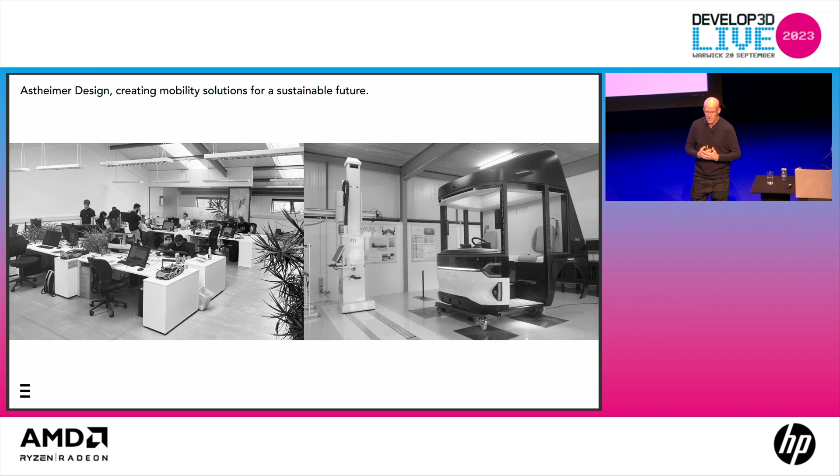Astheimer Design - we're based in Warwick. We're 12 people: designers, modelers, visualizers, and design engineers, and we're focused very firmly on the creation of mobility solutions for a sustainable future. That being said, we do work on a bunch of different projects - consumer electronics, mobile phones, furniture, etc. I think that's good because it enables the designers to work on different things. There's good cross-pollination of technologies and know-how, and it keeps the mind fresh in terms of creativity.

So just a selection of some of the projects we do, have done, and can show. A lot of this stuff, obviously, we can't show - as a consultancy, a lot remains confidential, especially until launched, and often even when they're launched we can't say we've worked on them. But a real broad spectrum of mobility, from aviation to marine to commercial vehicles, leisure vehicles, personal mobility, commercial mobility. Yeah, it's a great place to be in.

It's an area that as a team we're passionate about, and the projects seem to be becoming more and more varied, which is fantastic - it's great just to hop around the desks and see the variety of work being done. We work with a whole bunch of different clients, in a real collaborative way - not just with the clients themselves, but with engineering providers. Being 12 people developing a full vehicle, we need to work with other service providers: engineers, software designers, manufacturing engineers, to get the job done.

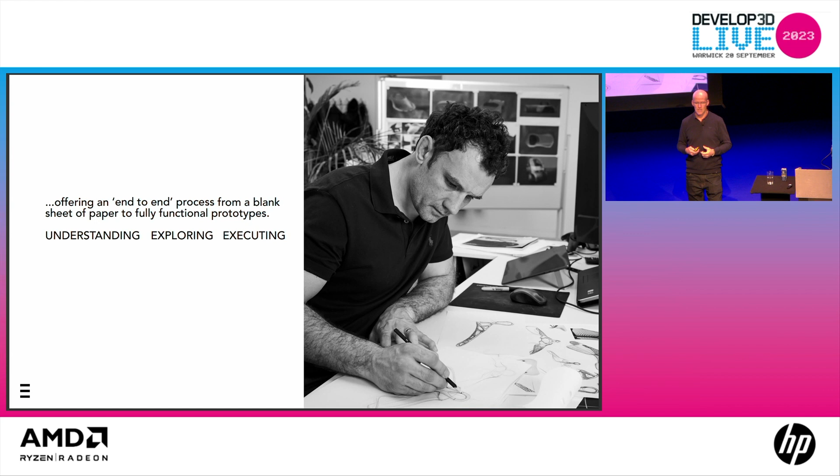As a consultancy, we don't have the time scales that in-house design studios often have. So it's all about aiming and being very focused on where you're exploring, doing that exploration, and then executing. Being a small team, we pride ourselves on being flexible, dynamic, and tenacious, getting the job done and doing what's needed. I think the people that really thrive in our environment are the real tenacious individuals, not least Alex, who sat here at the front.

Some of the themes that are really affecting mobility and the design of mobility: the changing context is one which is evolving, and it'll change this afternoon at 4:30, or it might not, who knows, but it's changing all the time. Vehicle architecture, with electrification, we don't need the cooling up front of the vehicle, so we can change that vehicle architecture. There's that opportunity to change vehicle architecture, which is fascinating.

New types of vehicles. The electric motor has enabled the ability of vertical takeoff aircraft, but also of foiling craft as well, and the size of the motor, the ability to feed it with a wire rather than a drive shaft, enables different vehicles now to become valid. And then just a brief look at the future at the end. So these are some of the themes that we'll be looking at.

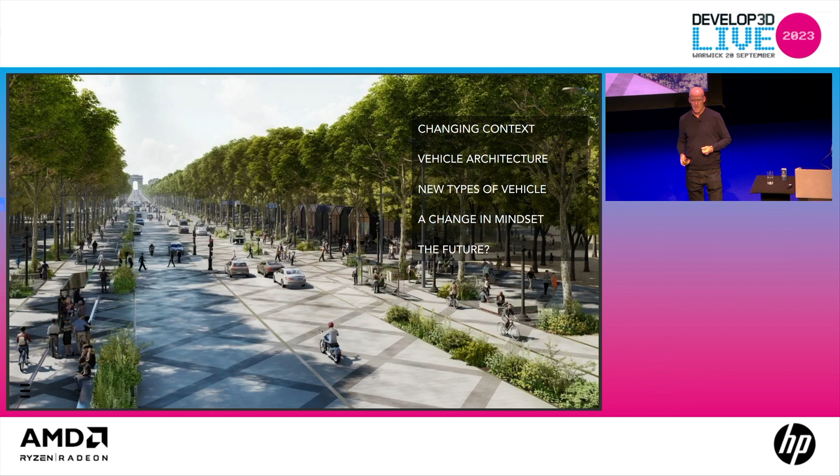I'll illustrate some of these themes with a case study that we've done, especially the first one of changing context, which I guess is pretty topical today. This is a project that we've done, and the most recent project that we've launched. It got launched at LCV at the start of September.

So, changing context. It's the cities and the big cities which are leading the way in change. It's actually the mayors of the cities who have pretty much more power than the prime ministers or presidents of a lot of countries to dictate what happens in their city, as we've seen with London and Sadiq Khan holding up his ULEZ change of legislation.

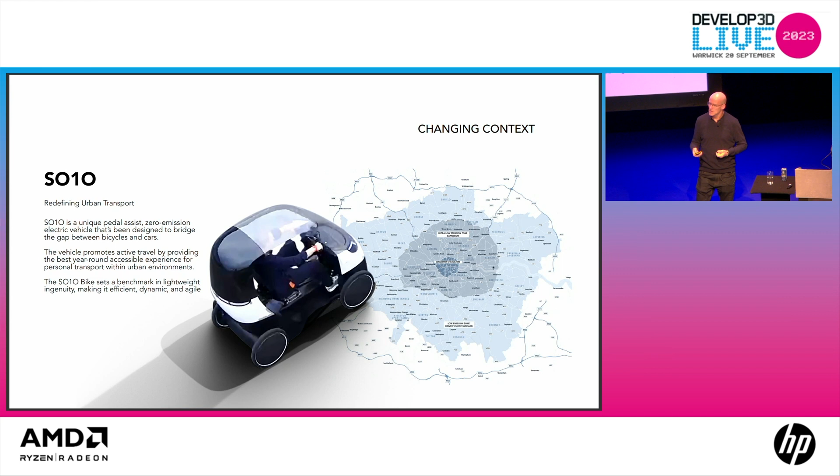Based on this scenario and this context, we created a small consortium along with ProDrive and an entrepreneur who is driving the project to create a small pedal assist vehicle intended principally for ride sharing. This is the first real showcase to show the process that we've been through, and I think it illustrates really well the process that we go through of design, development, and prototyping.

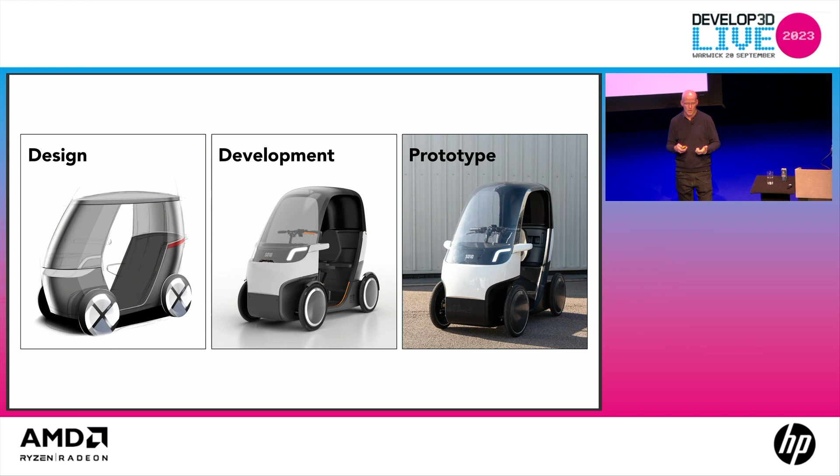It shows that very rapid product development process that we go through in the studio. So onto the design - we knew it wanted to be a 1+. We created an initial package that would allow for the motors, the batteries, the ergonomy of a single driver plus, and the idea of this pedal assist vehicle was to really extend the inclusivity of rideshare vehicles.

The cycles and scooters are principally used by young males. Very few females actually use the bikes, the Santander bikes in London, for example, or the scooters. So there's obviously a need for inclusivity, and there's obviously a need - if you want to carry something, what vehicle can you use? So this is aimed at that target market.

There's obviously a place for a scooter, there's obviously a place for a bicycle - great products, electric bikes - but there's obviously a gap in the market for an inclusive product of this type. So we wanted the design to be inclusive. It needed to be friendly, but it needed to be a desirable product, look dynamic, and attract people to use it. So that was the sort of briefing that we set out.

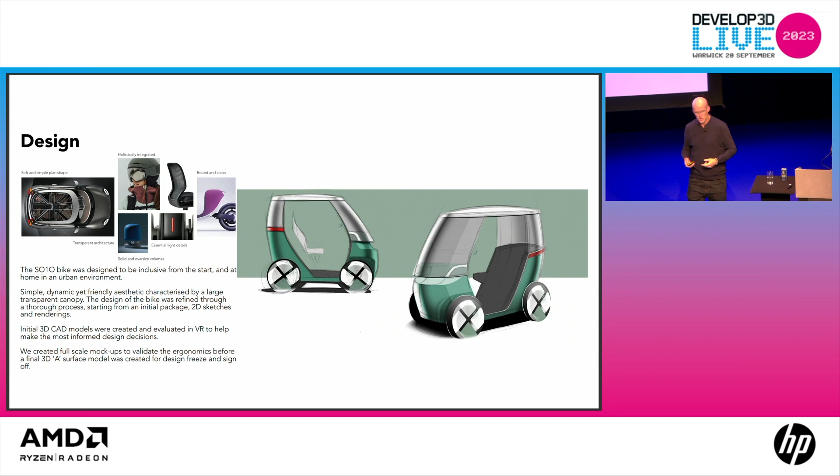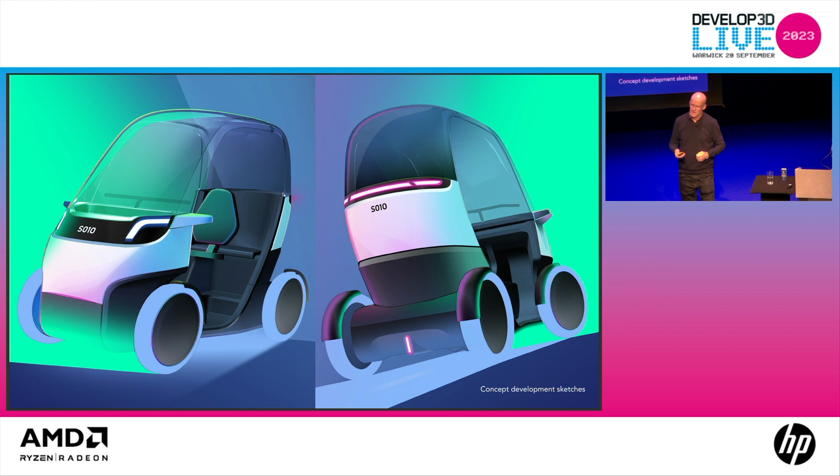We generally set out mood boards with imagery that creates that sort of feeling, and then from there the sketch phase. Pretty quickly from there we develop quick CAD models, so we move into sub-D - very quick CAD models which express that design intent over a package. These are quick renders out from there, made to look a bit poppy and fun, expressing the character and nature of the vehicle, and then from there these get developed into full computer-aided styling models.

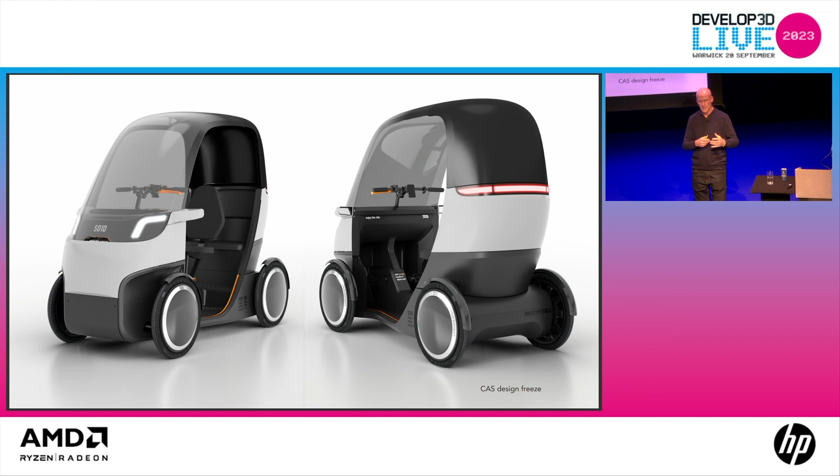We go into NURBS. We generally use Rhino, we have Alias, we use other sub-D modeling as well, but our general workflow is generally Blender, then through into Rhino, and then render in a variety of softwares depending on the type of vehicle, the type of product that we're rendering. I think in this case these are V-Ray, but there's a variety of different rendering tools depending on what we're doing, whether we're going into VR to analyze the product or not.

It's very much designed around the user, this product, for simplicity of use. You're going to have different people hopping in and out, so it's absolutely fundamental that the product is simple, intuitive and adaptable for different heights and sizes of people.

This is just some examples of the use cases of this vehicle. Not least when it's bad weather, you don't particularly want to be on a little scooter, but having a canopy above you will absolutely help. So just some of these images are CAD renders of the vehicle in use.

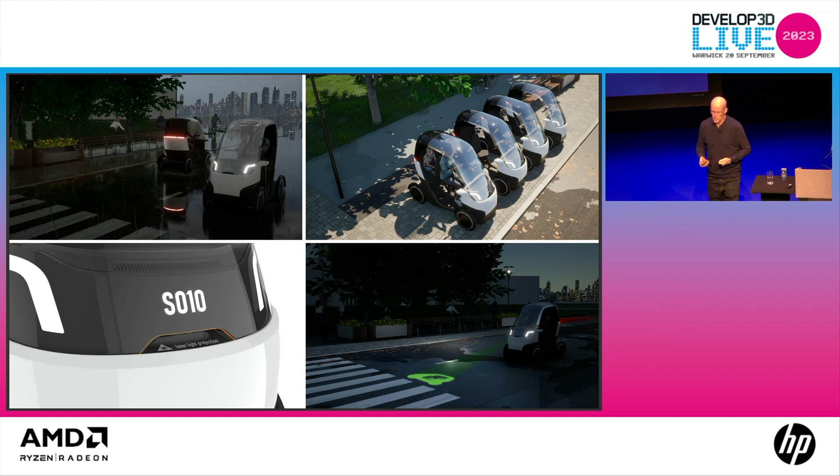Now on to the development of the actual prototype. The way we've worked with ProDrive in this instance is that they were responsible for the drivetrain system and the chassis, and we were responsible for all the touch points of the product - all the bits that you see basically, and the ergonomics of the vehicle.

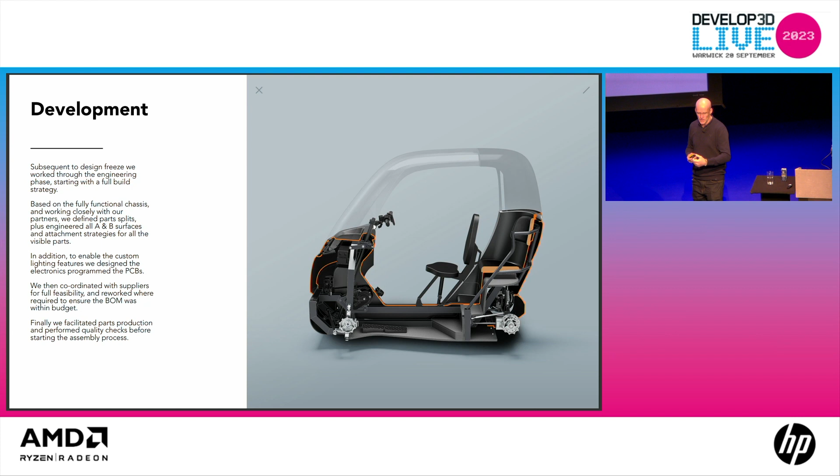Once we've got a CAD or a CAS, a styling freeze, a design intent, there's obviously that need for close collaboration with the engineering team to define the architecture of the chassis. Then we go through a phase of build strategy - how we're going to split the parts out, how we're going to build them, how they're all going to get together, how we maintain that fit and finish. So we explode out the CAD, create that build strategy, and that's done through the design engineering department of the studio.

Just something to highlight which was particularly of interest in this very small vehicle - you want to keep it as absolutely as small as possible - was the ergonomics.

There's going to be a lot of different sizes of people here, and there's a lot of different moving parts - you've got the pedals, you've got the steering wheel, you've got visibility lines, you've got to get in and out. So it's slightly more complex than just a standard seating position in a car.

There's a lot of different moving parts, and the thing we decided we needed to prioritize was the sightline - no matter what size of person was in the vehicle, the sightline needed to be respected as a key safety factor. And then with that, we needed them to be able to reach the handlebars and the pedals without their knees hitting their elbows or the handlebars. So it's quite a puzzle.

The design engineering team, led by Alex, facilitated these constraints with Grasshopper, a parametric software with algorithms to say 'we want to protect this sightline, but we want these other parameters respected.' So the ergonomics of different sizes then need to reflect that, and then we validate the CAD with physical mock-ups.

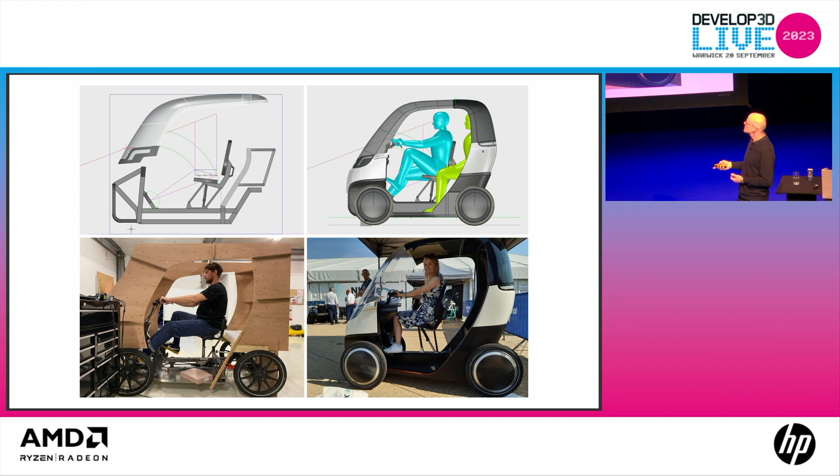The chassis was built at ProDrive, got sent up to us, and that's where we installed all the body parts, the body panels around the chassis.

This is a one-off initial prototype. In the design for manufacture phase, which is still to begin, there'll be a whole VAVE process which will go into design for manufacture. In this case we needed to get the job done very quickly.

A lot of the parts were 3D milled, a lot were 3D printed, some vac formed. But that whole process needs to start again. A design intent was there though - this is a proof of concept, and that was the key objective.

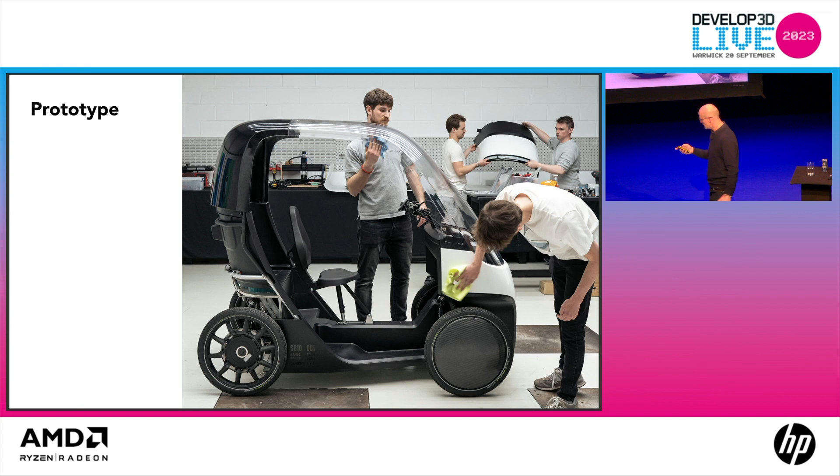So that got put together in our workshop downstairs, and then it was launched at LCV this year, and received very good press. We're still to await to see what happens next, but hopefully we go through into the production readiness phase for the project. But this is an example of what our cities need for the future.

In my opinion, the most important thing we can think about in this new context of sustainability is efficiency, especially as we move into the electrification era.

The most efficient electric vehicles are small vehicles - the smaller you get, the lighter you get, the more efficient they are. That's true with any vehicle, but the difference with a battery electric vehicle is you need to carry the batteries around - the bigger the vehicle, the bigger the batteries, the more you need to carry. Slight difference to an ICE.

Light weighting is absolutely fundamental, and the thought process of efficiency in everything that you do in the design of these newer vehicles is fundamental.

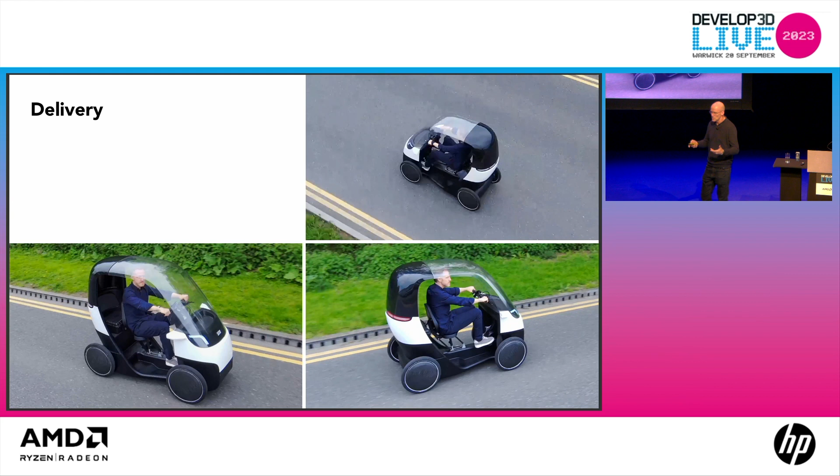As I mentioned before at the beginning, another theme that electrification will allow us, the opportunity really that it allows us, is to change the vehicle architecture. And a great example of one of the projects that we've done is the Volta trucks.

The Volta, they weren't yet Volta, but the founders came to us back in 2019, entrepreneurs more than sort of car people, and said, right, we know that there's a business opportunity for a mid-size truck. Had no idea what the truck size would be, how it would be. So we started and created that product development journey with them, laid it out with them, went to see the customers, understood their needs, and quite quickly we decided it's going to be 100% electric.

It'll be urban delivery, 16 to 19 tons, and the opportunity that we had was we could move the batteries and the drivetrain. We're using an e-axle into the ladder chassis. So that allowed us complete design freedom in the cabin.

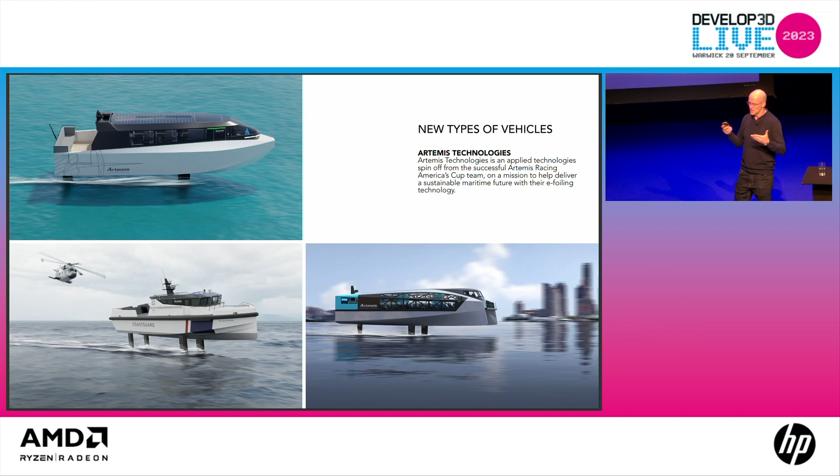A change of mindset, and I think this is something that we're going to need. Thinking about what happened with COVID - COVID came, we needed to change, we changed. The climate crisis is a longer burn. I don't think there's any doubting it. But because it's a longer burn, we're thinking let's kick the can down the road. If we need to change, we can change.

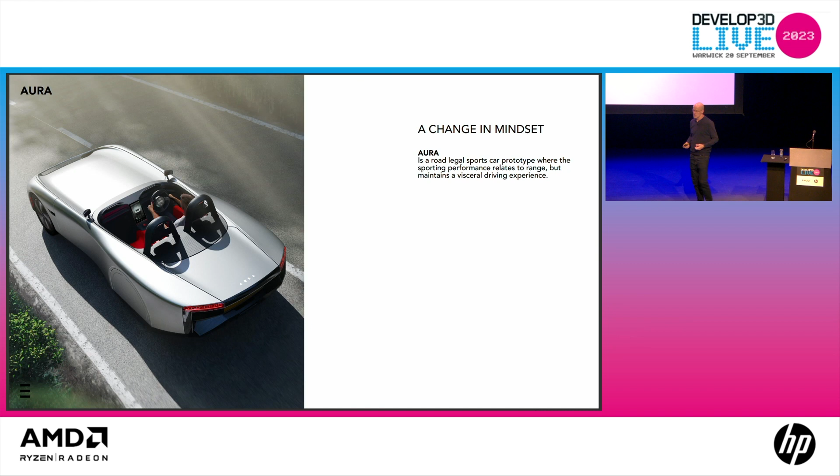And then on to the future. I read something actually on Tuesday, which I think summed up really what artificial intelligence is and how we should consider the impact it will have on our processes. It comes from a guy called Robert Hooke back in the 17th century, a polymath, which I had to Google, which means a very learned person. At the time of the development of the microscope and the telescope, his phrase about it was that these instruments were the adding of artificial organs to the natural, which I thought was a fantastic way of describing what a telescope and a microscope are.

As I think we should see, especially talking about the design community and designing mobility, I think we should see AI really for what it is, which is another toolkit, another part of our toolkit in our development process. And I think the important thing in the design process is that we understand the context, we understand all the tools that are available to us, and we create the most efficient and effective process.